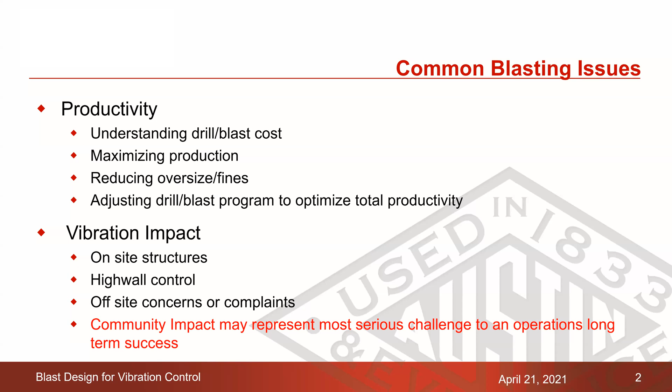I have 3 slides here as an explanation of how this has gone. There'll be 3 mining operations you'll see here, actually 4, and you can see the development around it. But the important thing to remember is when these places were developed, there was nothing around them. I often spend time in mining operations that don't have neighbors nearby, and their opinion is, well, Stuart, that's fine maybe where you live, but I don't have to deal with it. You have no assurances what's going to happen anywhere nowadays around a mining operation, and over the course of time, you really can't predict what the circumstances are going to be. If you're not prepared for that, it can have long-term complications.

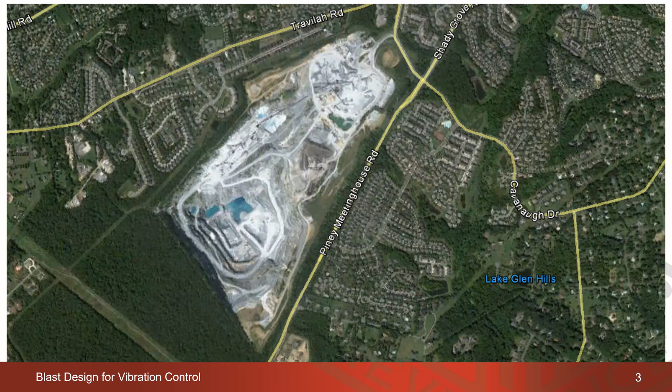Can you hear me now? Yes, sir, sorry, that was my internet dropping off. But anyway, thank you, Andrew.

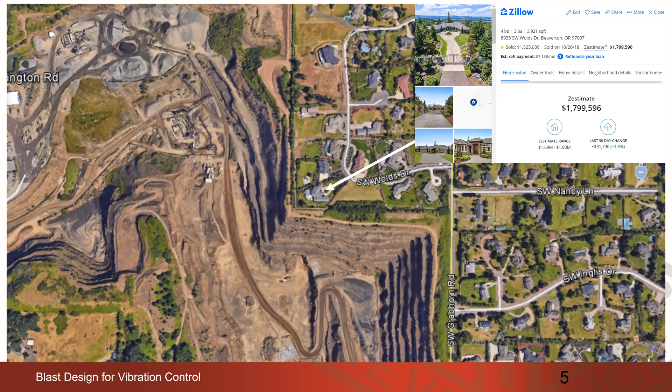So when we look at improved blasting designs, we look at several things. We have increases in electronic initiation systems that have brought a whole new world to us, and that has allowed us to do some new things with vibration. As far as active vibration cancellation, we can do more real-time analysis and look at using alternatives for blasting.

We must say, though, that a lot of times the things we try to do to make improvements are severely hampered either by people's pre-existing beliefs in what works, or by regulations that don't allow us to use the latest technology. So it's important not only to understand how it works, but to be able to relay that message if you need to get the point across that there is a different, better way to do things, and how we can improve on what we're doing.

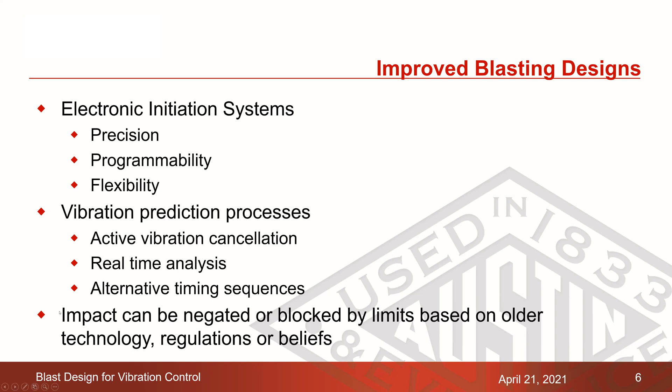Okay, so let's start talking about fundamentals for vibration control. Bill touched on this last week, and again, I think it's worth going back over. When we detonate a blast, we're given a given amount of energy, and we're really going to do 4 things with that: we're going to break rock, we're going to move rock, and whatever doesn't go into that is going to make noise and shake the ground. There's nothing else to be done. Energy can't be conserved; it has to be used, and it's going to go into one or more of those 4 methods.

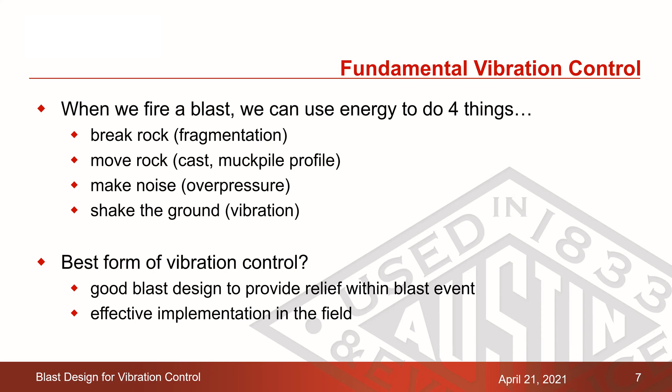So you can really make a talk on vibration control really simple. I can make this easy for you guys: the best form of vibration control is a good blast design. You can have all the latest technology, vibration software for vibration control, but if you don't have a good blast design, it doesn't matter - it can't fix things for you. The first thing you have to do is have a good, sound blast design and effective implementation of that in the field. When you're convinced you've got those metrics in place, then you can look at additional technology to fine tune your vibration control. Until that's in place, you're not going to get where you want to be.

Andrew? I just want to spend a few minutes - we touched on the 8 millisecond definition last week, and just a little bit more detail on that because it plays into everything we'll talk about here. This is the data from the original study back in the 1960s that led to the 8 millisecond delay criteria or definition. You can see it's for 3, 7, and 15 hole shots, shot with 4 different sequences: instantaneously, with 9 millisecond, 17 millisecond, and 34 millisecond delays.

When you look at the results, there's no real consensus whether a fast or a longer delay gives the lowest vibration. The only thing it tells you is that using a delay is going to give you some form of vibration control versus shooting instantaneously. But that's really all we get out of that, and there's no magic that comes from using a specific delay. Next slide.

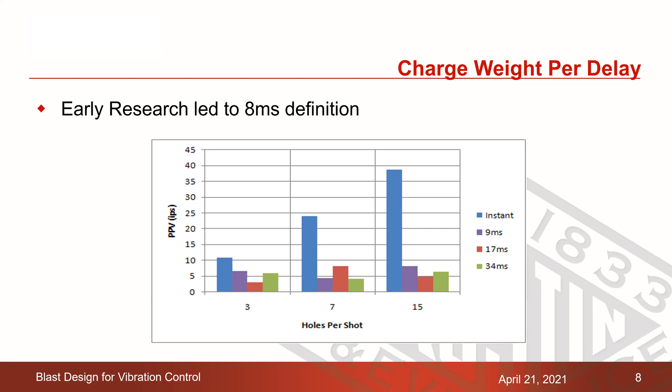If we get into that and really look at what went on in that research and what was available back in that time period, they basically used the technology available in commercial mining. At that time, 9 and 17 millisecond delay detonators were very common and available, and that's what they used in those studies. They were electric, not electronic, detonators, listed with plus or minus 1 millisecond accuracy. So the writers of those papers said, if we have plus or minus and we use 9 milliseconds as our shortest delay, then probably 8 milliseconds was the minimum delay used in these studies.

Their report came out and said if you use delays, it's a means of reducing vibration. And through that came the 8 millisecond criteria that we have. If 25 millisecond detonators were available and they'd used them back then, we'd probably be sitting here talking about the 24 millisecond criteria. There's nothing magic about that 8 milliseconds.

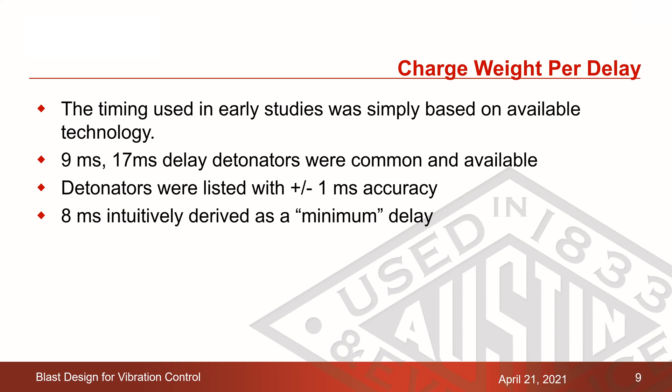As we found since the introduction of vibration modeling, it really doesn't serve very much of a purpose anymore. But we have it. It is used as a definition for charge weight per delay, which leads us to the next slide.

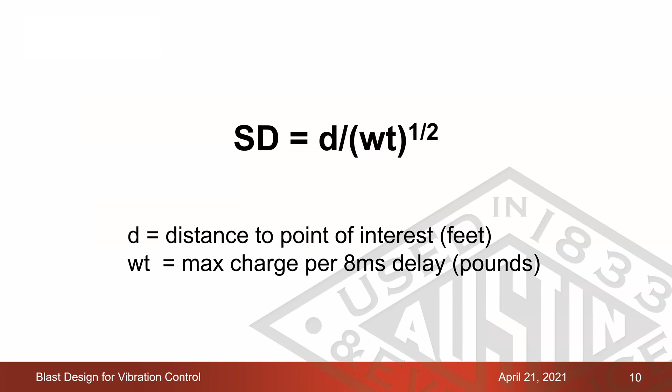Along that line, scale distance of 18, there were shots recorded with a peak particle velocity of 0.14 inches per second, and others as high as 2.9 inches per second. So basing vibration prediction or vibration control in your shot design on scale distance - it's better than nothing, but it really doesn't get us where we need to be to have any confidence in our results.

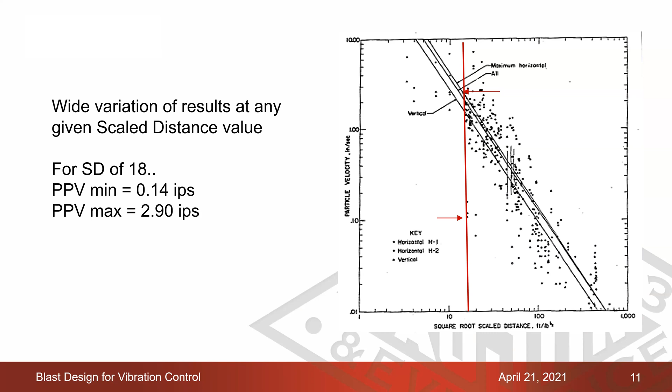That's led us to use things kind of on the passive side for vibration control when we need to reduce things. We've reduced charge weights per hole. We've used decking, reduced shot size, smaller hole diameters. Been there, done all that.

Does it work? Yes, to a certain extent, but it all comes with a cost, whether it's longer time, more labor, more drilling costs, more product costs. Usually it's a hard balance to achieve.

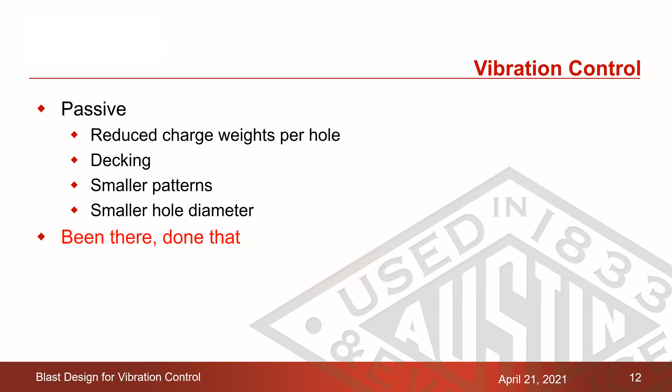So what we have nowadays that we can use, especially with electronic detonators, is active vibration control. It's the concept of linear superpositioning that we've used, and we're going to demonstrate that. The use of electronic initiators has greatly enhanced the efficiency of this technique.

When you marry that with some of the new concepts in software design that Andrew's going to show you in a few minutes, it's really exciting where we are and what we're able to do to get on the front end and get control of vibration.

Again, a lot of my experience is with off-site vibration, but I've certainly done my share of near field, and the rules and laws of physics are the same near field as far field. So the same theories and technology work in both places.

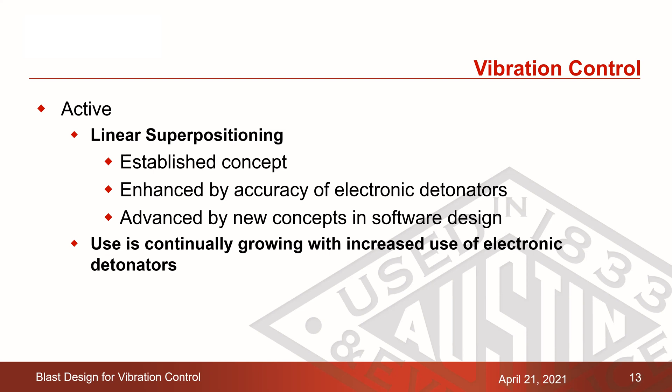So we want to begin with seismic wave interaction because this is where it all starts. Hopefully this is review for everybody, but just to make sure we all understand - when we talk about seismic waves or vibration waves, we're really talking about compression waves that behave just like sound does in the air. Seismic waves behave very much, almost identically to acoustic waves, and have some of the same characteristics. Again, compression waves, we get lower frequency with distance, and most important, those waves can be influenced by other waves. So we can look at a very simple sine wave here to see how that works.

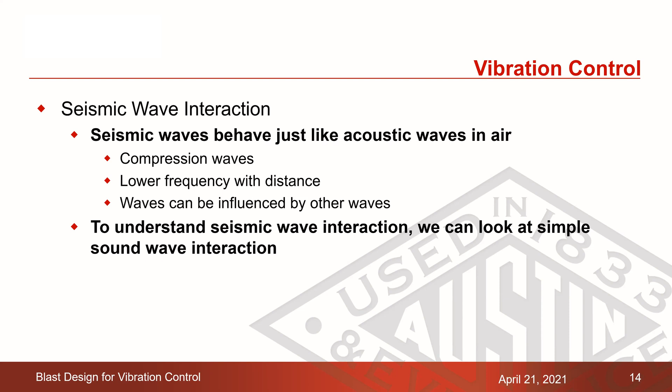So here, we're just going to look at a single sound event, a very simple sine wave. Next slide.

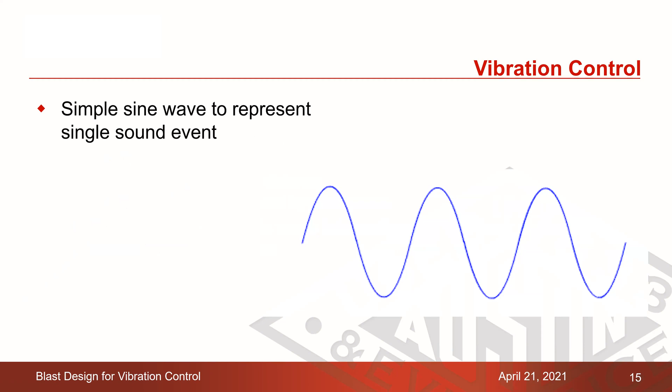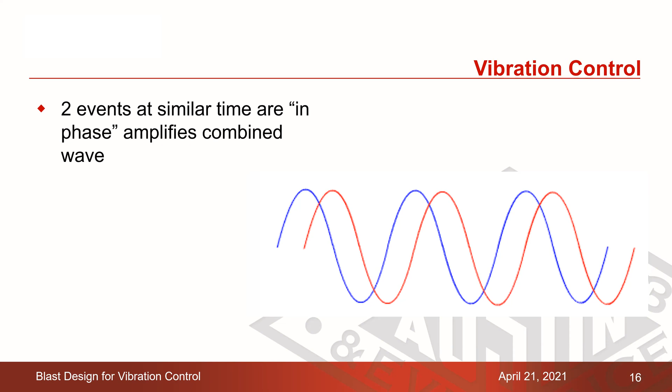If we introduce another sound, and those sounds as they meet, they're very close to each other as far as being in phase, meaning the peaks match and the troughs or valleys match. Those waves get summed up and they actually get added and they influence each other. So the result is going to be, on the next slide, an amplification of that. We will have a higher resultant wave based on those two input waves.

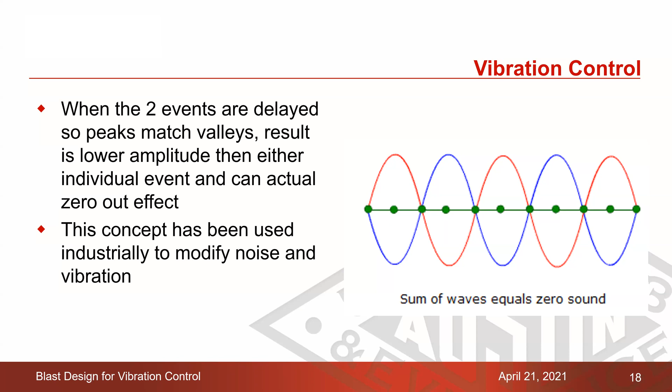The same thing happens if we adjust and get those waves out of phase. Here you can see when we look at the red versus the blue, a peak is matching a trough, and the result can literally be a summation that comes out to zero or near zero. It's a simple concept, but it's effective. It works in nature, and we have started using that in industry in the last probably 20 years, especially.

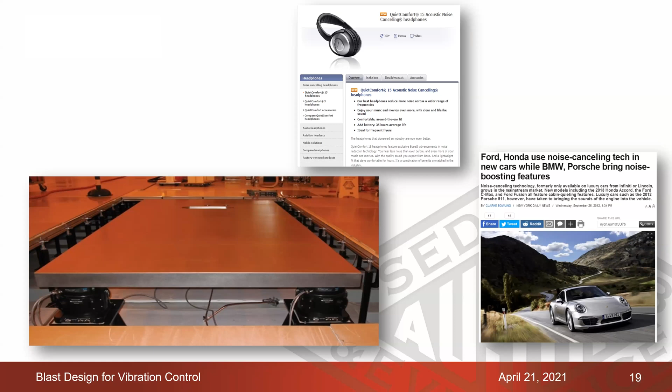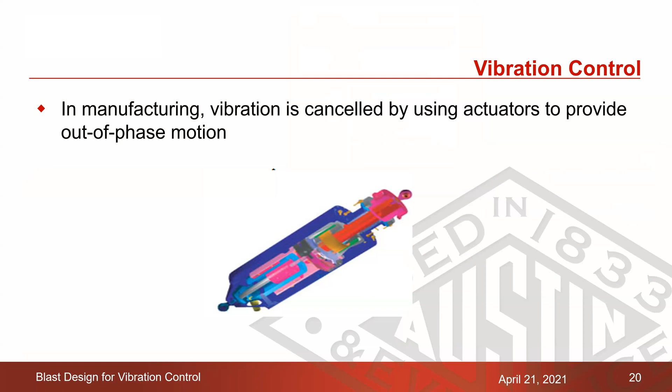So again, in manufacturing, we use mechanical apparatus—actuators—to provide our out-of-phase motion to cancel that out. So what do we do in blasting? A little bit different. Here, we're going to use the energy as our holes detonate to cancel out the vibration that's created from previous hole detonations.

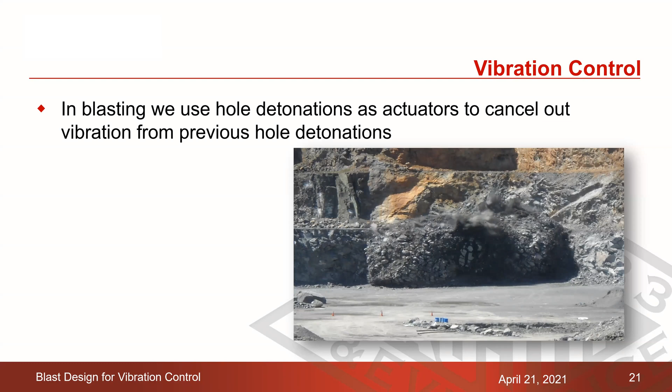So this is where the idea of vibration control came from—looking at what we could do with acoustic waves and translating that into using that same application in seismic waves. So I want to look at some waves again, but look at it more from a blasting standpoint.

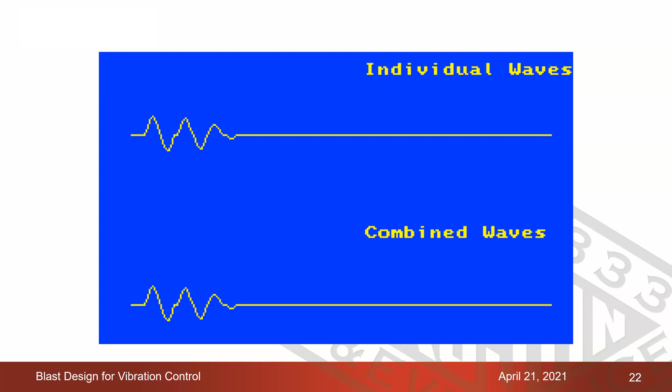What happens next if we go to shooting all 5 of those holes at the exact same time? It's hard to see because those waves are stacked right on top of each other, but imagine there are 5 waves there. When we sum them up, again, the peaks and troughs match up, and our combined wave is going to be much, much higher. When those waves match up like that and give us higher amplitude in our resultant wave, that's called constructive interference.

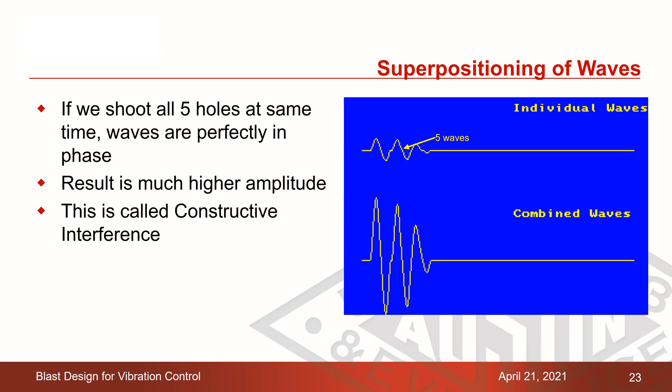So let's look at 8 milliseconds. Remember that when you look at a seismogram and those waves, the x-axis is motion versus time, showing how motion changes over time. Based on the scale shown, our 5 holes have fired, and you can see they've been staggered a little bit. That stagger is the equivalent of 8 milliseconds based on the scale on the x-axis for this example.

So we've put 8 milliseconds between them. But you notice it really doesn't help us, because they're still in phase. They're still matching peaks and valleys, so we still get a much higher amplitude. We're still getting that constructive interference as a result of it.

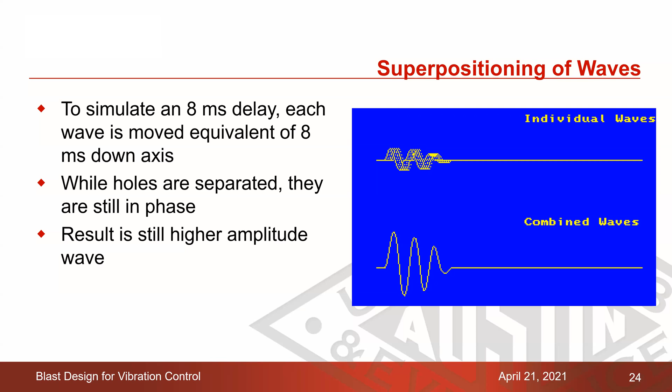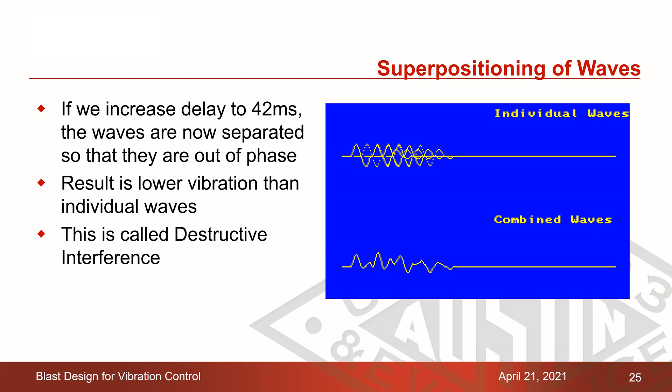When we can use the energy in our shot to create cancellation like this, we call that destructive interference. That is the basis of vibration control software: to try to determine sequences of holes firing that will cancel out energy from adjacent holes or previous holes.

Now, what happens if we go even farther? If 42 is good, maybe a longer delay is even better. Well, again, we're talking about sinusoidal waves here, so if you spread them out too far, you see what happens is we get back in phase again, and now our vibration goes back up.

So there is no simple rule for a blaster, no way for him to know intuitively or on his own whether shooting fast time between holes or between rows, or slow times, is going to give him that destructive interference he wants. It all depends on knowing the shape of the seismic wave that's going to be created by every hole when it shoots, and using that information to determine what delays are necessary in order to cancel vibration out rather than enhance it.

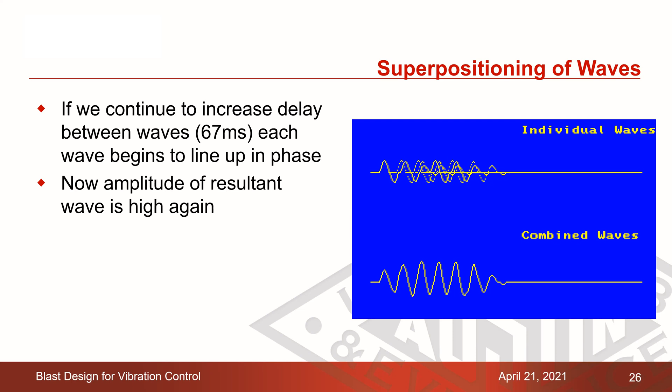So I want to give you an example here, and we want to make sure we leave time for questions. But we're going to walk you through some software that does this.

But again, a couple things I hope everybody keeps in mind: when we talk vibration control, we're talking blast design fundamentals - powder factors, energy distribution, where your holes are distributed, accurate drilling, confinement, proper burden on the face holes.

All that is going to play into not only a good shot in terms of the results you or your customer is looking for - fragmentation, muck pile development, whatever - but you find that when you have shots that behave the way you want and give good production results, they're also going to give you the best vibration results. Shots that are poorly designed, where there are problems, or maybe you lose holes from drilling and the shot comes out very chunky with oversized material and the rock doesn't move, your vibration is usually really high.

So we don't have to make a sacrifice between productivity and vibration control, whether that's controlling vibration for a highwall, structures in the mine, the crusher, or buildings offsite. We don't have to sacrifice one thing for the other. Good blasts mean good vibration control - they work hand in hand.

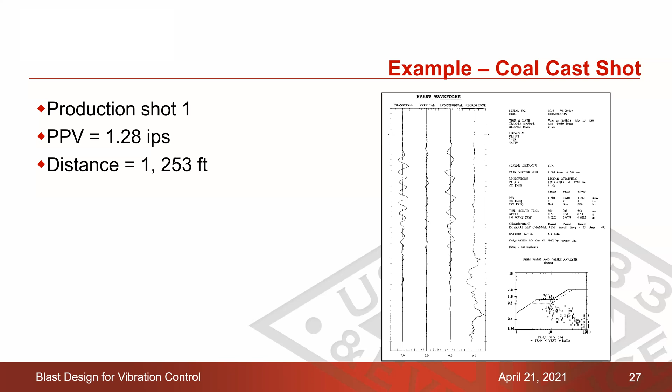Right next to this shot, we went ahead and did a signature hole. Thank you, Andrew.

That signature hole was identical to a production hole, same diameter, same depth, same burden off of the free face. It's as if you're drilling a production shot and you just stop after the first hole, loaded with the same product and shot. The distance is identical or almost identical, and the particle velocity from that single hole is 0.51.

I believe the shot size for this mine was about 150 holes. In essence, in the model, we used that wave 150 times to represent 150 holes firing. The software ran algorithms to determine what delay between holes firing, by moving them on that time axis back and forth, doing it systematically, and then summing those waves up would give us the best vibration results. That's all it does - gives us timing recommendations that we can pick.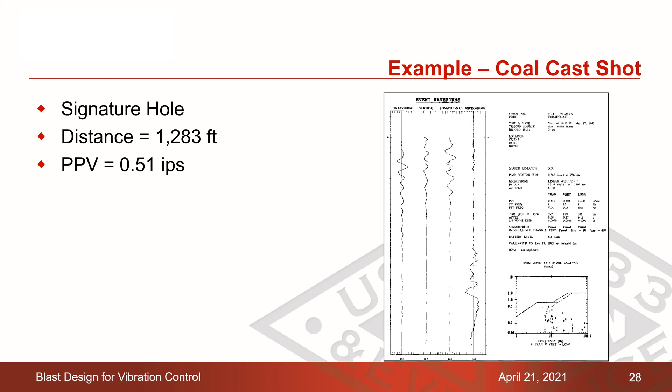The next shot, which I did right next to it, you can see the distances - actually I was a little bit closer - but same pattern, same number of holes, same pounds per delay, same pounds per hole, and we cut vibration by 36%. That's not making any other change, doesn't cost the mine any more money. They're not paying for more labor, more drilling, more products. It's a simple change in the timing used to facilitate this.

With electronic detonators, with most of the systems, you have 20,000 delays, 0 through 20 seconds in 1 millisecond increments. This gives us an amazing tool to come up with and find precise timing using software based on that signature hole that's recorded in the field.

So it's responding to site-specific geology. The shape of that wave is determined by putting that pulse in the ground by that signature hole, that test hole, letting it rattle through the ground and recording it at our critical structures. The shape of that wave is basically a geologic signature of seismic transmission through it, hence the name signature waveform. We use that over and over again to simulate a large shot, sum up the waves, and here's what our result is.

Here we're showing a reduction of 36%. So real simple, that's the way basic vibration control software works.

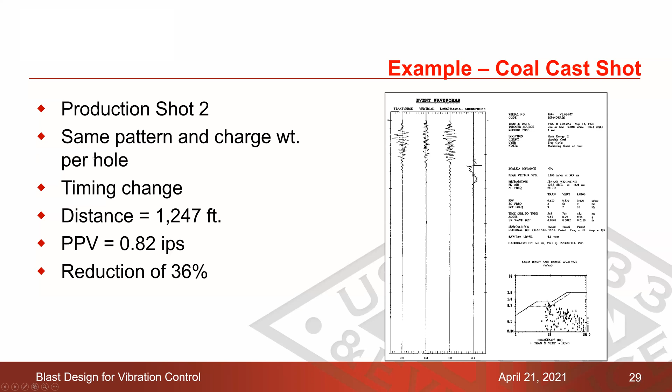All right, thank you Stuart. Good to be here with everyone. As Stuart's mentioned a couple times already, one of the big things is you've got to have proper blast design in order to get vibration results that benefit you, your company, whoever it may be.

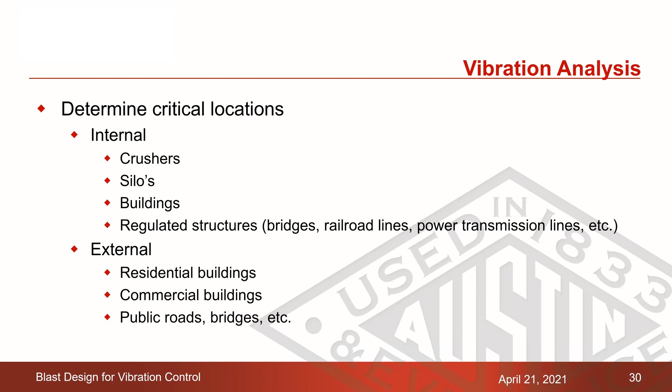What we do with the Paradigm software, as Stuart mentioned, is one of the big things is we have to identify the critical locations for each blast. That can be internal locations such as primary crushers, storage silos, mine site buildings, any regulated structures that cross the property, and even extending into external critical locations such as residential buildings that may be getting close to the mining property, commercial buildings, any public roads, bridges, power lines, any number of things.

A big part of vibration analysis and making sure your vibrations are what you want and good is you've got to be able to determine where your future mine plans are. This goes into setting up the locations for where you want to get signature hole data from, and being able to drill those in areas that you are going to in the future, even if they may be 6, 12, 18, 24 months into the future before you start mining in those areas.

The seismic data will never go bad. It can be used 2, 3, 4 years down the road. So if you've got the capabilities, it's always good to get the data early and have it ready to use, rather than scrambling to collect data once problems present themselves.

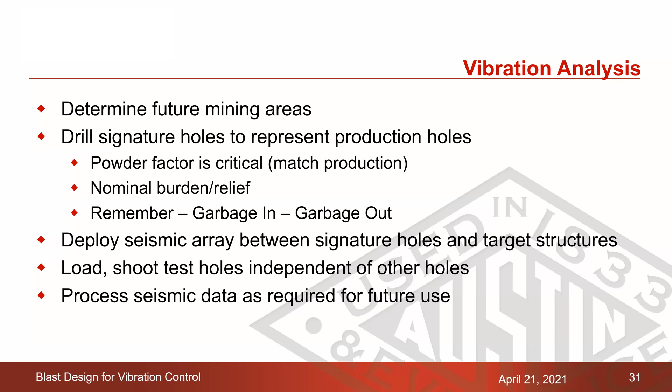This all goes into making sure that signature holes are loaded the same way, with the same burden and relief that a normal production hole would have. When collecting signature hole data, you want to make sure your seismographs are set up correctly. There's no room for movement in the seismograph, because if you're getting bad data from your signature holes, you're going to have bad data to try and make predictions with or analyze your vibrations.

As we've mentioned already, vibration analysis begins with your shot design. We've done this on manually laid out shots by the blaster - the day of a shot, he'll lay out another shot in the pit in a different location, or using a UAV drone and doing 3D models, using smart drills. This definitely helps control vibrations more. Once we've done this and have the design set for how it's going to be drilled, we can start diving into more of the vibration analysis and creating the best blast plan going forward.

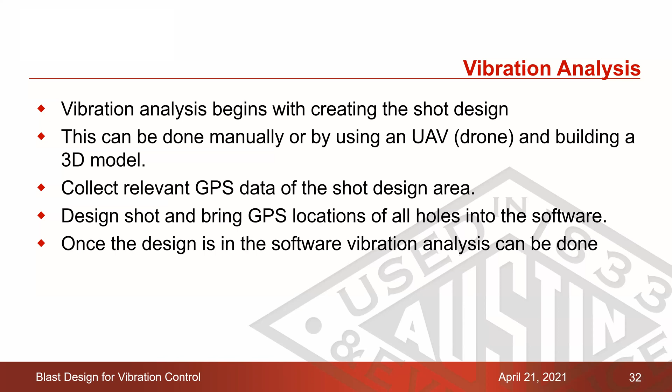As Stuart mentioned, we use Paradigm software as a big part of our vibration analysis. In the software, we are able to produce any timing combination you could want to use - anything from a fixed per distance scenario, where you assign a certain delay in terms of milliseconds per foot, and tie the holes together in your shot. It will measure the distances between those holes and assign the delay period as needed.

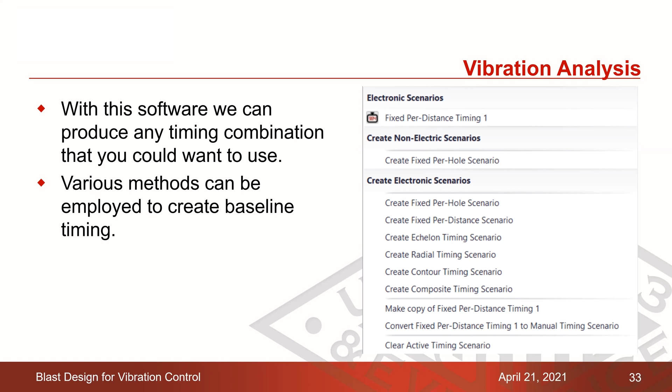We can do a fixed per hole scenario, echelon scenarios - really any timing scenario that works, we can use that and come up with a version that will work.

These are some very basic tools we look at when doing our timing vibration analysis. We can see how the shot is going to progress in terms of which hole is going to fire when - useful to see, making sure you don't have holes in front of something that shouldn't be going off yet, or holes behind something that shouldn't be going off yet.

As well as timing contours - so if in your operation you have certain benches that tend to shoot better in a certain direction, you can make sure the timing plan you came up with is getting that rock moving the right way to give you the best muck pile and vibration results.

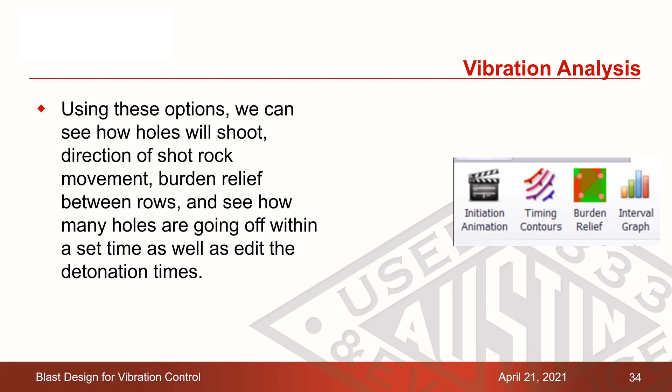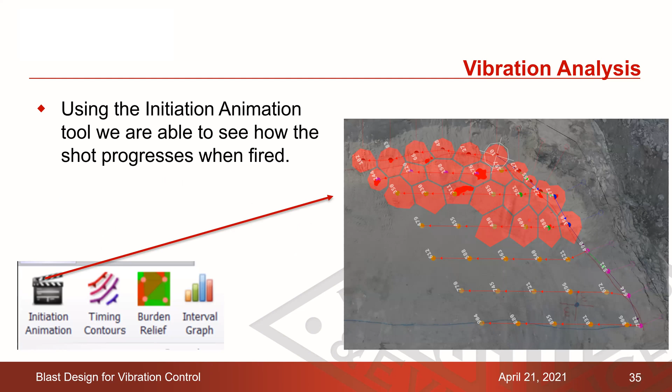Same with the burden relief and interval graph. Here's the initiation animation that I was talking about. As you can see, we can follow and see how the shot is going to progress as the holes are detonating. It's a good double check, making sure the timing's correct, making sure nothing funky is going on.

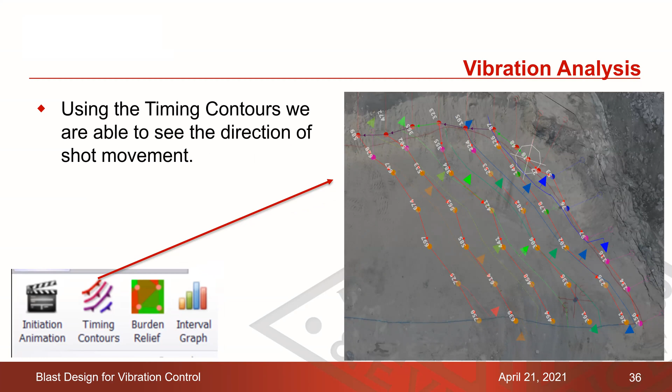Burden relief - this is showing from row to row how much time and movement the rock in front of each hole is going to have before the hole detonates itself. It's a good tool to use to make sure you've built enough time to allow for rock movement and get the correct burden you're looking for on your design.

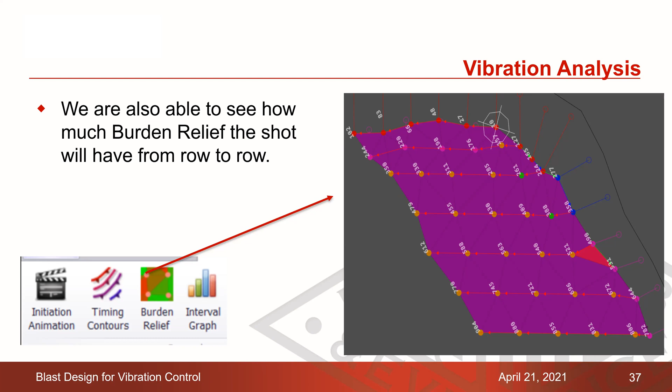Looking at the interval graph, we're able to see if we have more than one hole designed in the timing scenario to shoot at the same time or within a certain delay period. This is beneficial when it comes to limitations of charge weights, or holes firing in a given interval, such as what Stuart was mentioning with the 8 millisecond rule.

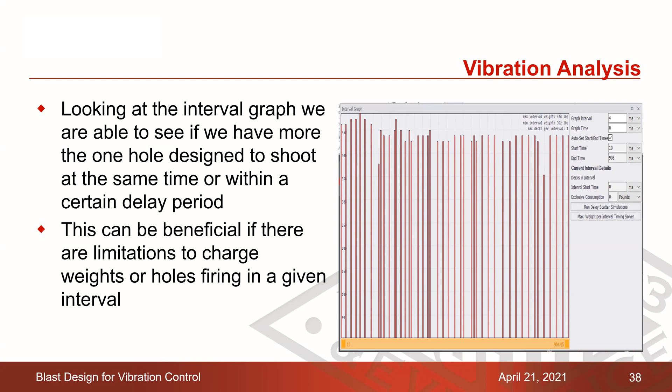This is where we really get into being able to optimize our vibrations, using these tools. But first, we have to optimize our basic design, and then we're able to analyze the vibration and fine tune the results to what we're looking for. Using these tools, we're also able to get a rough vibration prediction for the shot, if that's needed or if it's a more critical area - we know beforehand going into shot day what the rough vibrations are going to be.

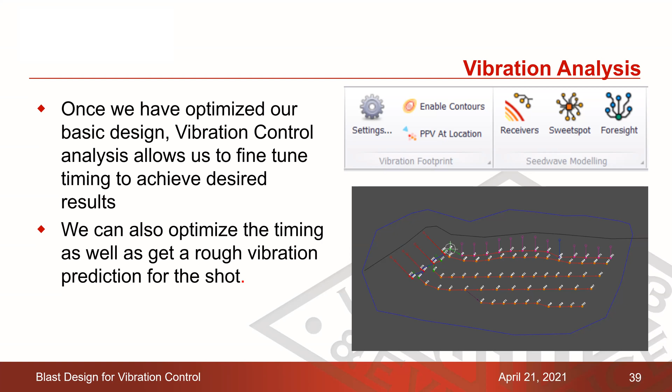Continuing, here we can see data from the signature hole testing can be accessed. It allows us to determine critical structures and what data to use. The blue dots are seismograph locations, and the black lines are faults going towards signature holes. So the signature hole data, you can trace back from the points to the seismographs, and those seismographs are using the data that was collected by shooting those signature holes for future consideration when determining vibration predictions.

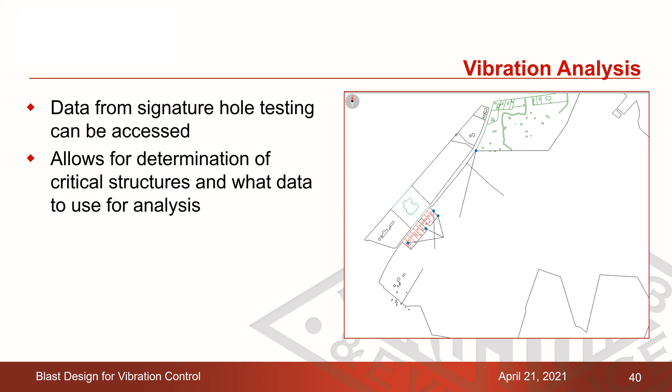You can also see the shot pattern, including the nominal timing created to allow for accurate determination of data. The location of the pattern, signature test holes, and critical structures is all used by the software. We'll see in more detail what that looks like over the next couple of slides.

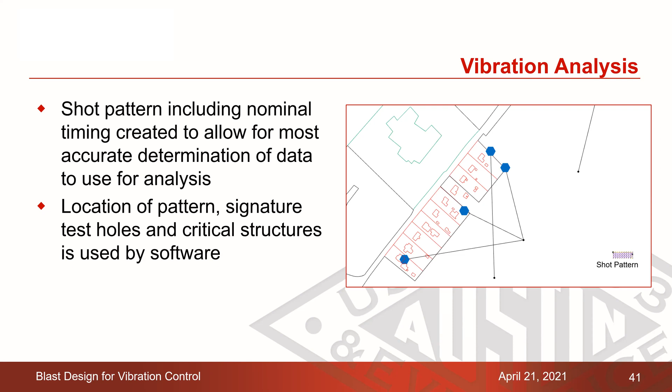In many cases, our signature holes are recorded with production blasts, and using the software we're able to clip the waveform of the signature hole itself. So as you can see here, on the longitudinal, transverse, and vertical waveforms, we're able to see where the signature hole was fired, and we're able to use that and clip that data for future models and future considerations.

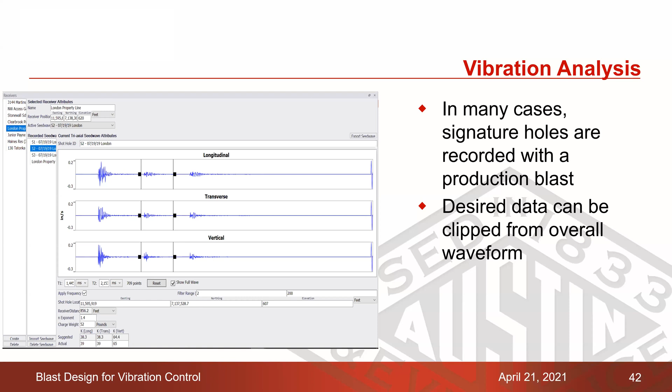This is one of the tools we can use to find and dial in our timing design to create an optimized timing plan. If we know the propagation velocity, it can be entered. We can also weight the different structures and different seismograph locations. If one is closer and of more importance, we can weight that one heavier in the model, and the simulations will adjust accordingly. Or if everything's of the same importance, we can leave the weighting the same and it will determine the best from there.

Looking at the delay periods, this will run in simulations and look at the different timing schemes that could possibly be created from plus or minus 5 milliseconds of the delay. So if one delay in the generic timing scheme you create is 21 milliseconds, it will look at a range of 16 to 26 milliseconds to analyze and try to optimize the vibration results.

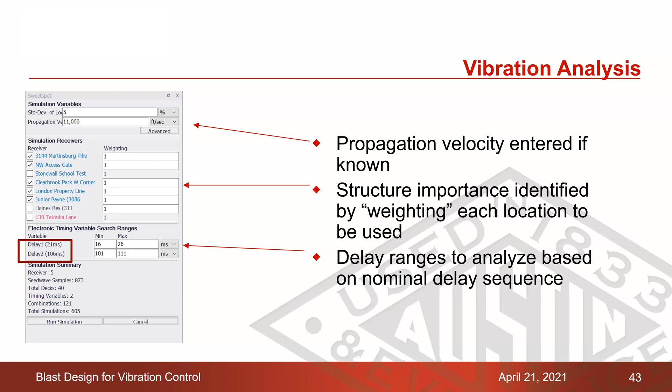Additional analysis is based on the Monte Carlo technique. This allows us to introduce randomness to the timing variables and come up with the best delay sequence. The Foresight tool, which we'll get into more in the next couple of slides, allows us to simulate the blast any number of given times to get a prediction of the resultant vibration using whatever timing sequence.

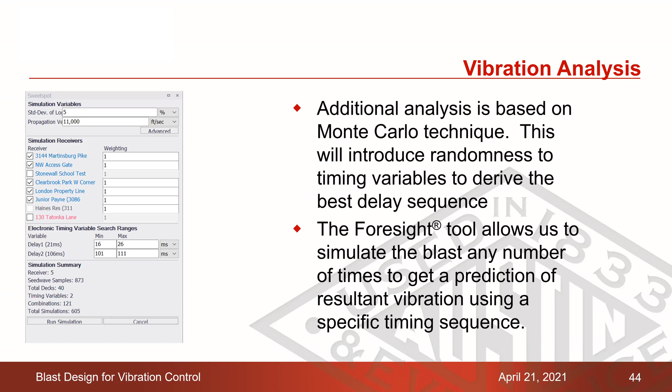So here's the results of the Foresight tool. As we can see, you can sort the results by your peak particle velocity, your PPV, your frequency, and your perception index. Your perception is going to be a result of your PPV and frequency, so the lower your perception, the idea is the less impact it's going to have on your seismograph location.

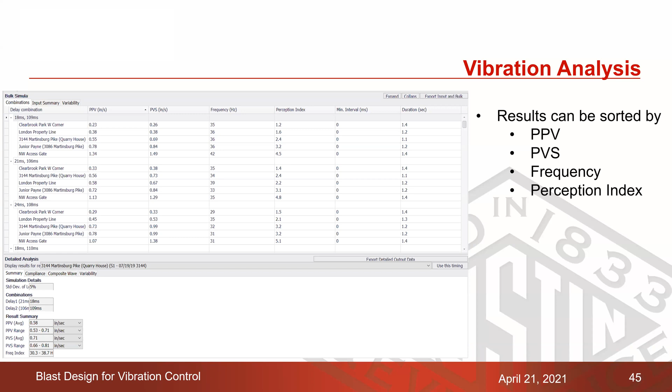This is another tool where you can choose certain seismograph locations to optimize your timing for, or in this case look at 3, 4, even 5 different seismograph locations. You can weigh the results based on your PPV, frequency, perception index, or any number of factors to select the best timing solution for that specific shot.

Moving ahead, you're able to select and optimize electronic timing to ensure compliance at all nearby sensitive receivers. We get those results using the Sweetspot tool and the Foresight tool.

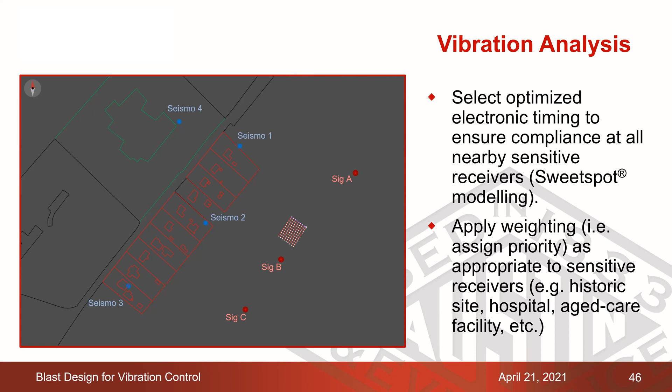We're able to apply weighting to see which seismograph location is a more sensitive location, or if they're all just as sensitive, we're able to leave the weighting the same.

This is another tool we're able to use in the Paradigm software. It will allow us to identify directions of vibration enhancement due to the timing sequence and timing plan, and allows us to see the impacts of what the vibrations will be 360 degrees around the shot area.

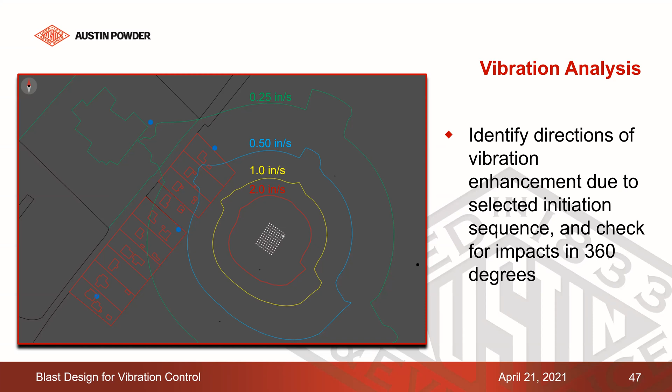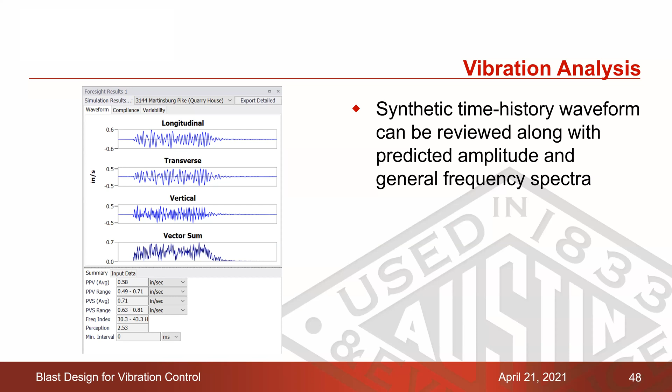So just to tie everything back together, when using the Foresight tool, we're able to see a rough approximation of what the waveforms will look like, along with predicted PPV average, amplitude, and general frequency. So if the selected timing that we either use or come up with does not meet our expectations, we're able to go through these tools multiple times and make adjustments in order to find the best sequence and timing plan for us.

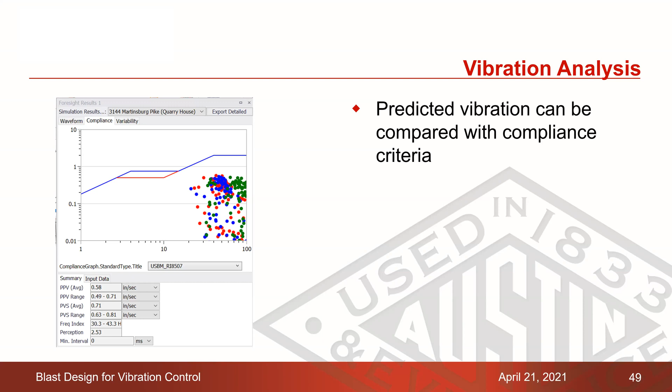We're able to see what the predicted vibrations are when compared to compliance criteria, such as the Z curve shown here. It's a really useful tool, especially for operations that are a little more sensitive to vibrations, either because of close neighbors or important structures nearby. Being able to see this and confidently know going forward that the timing sequence is correct and should have no issues as far as regulatory compliance is good to know.

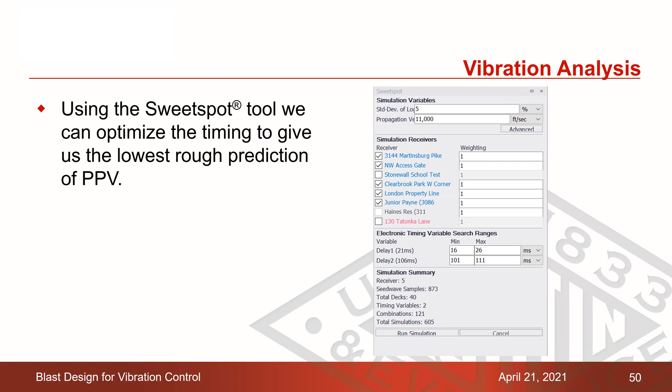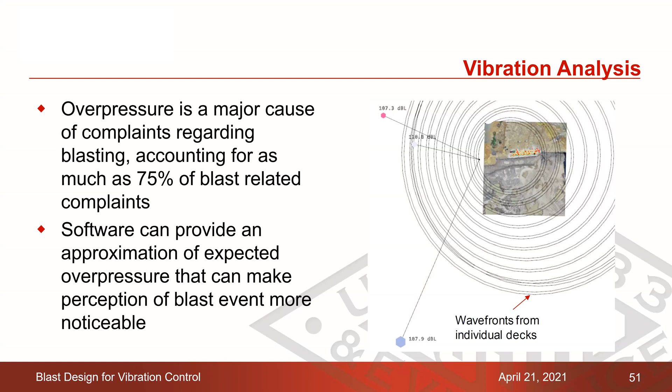Overpressure, as we all know, is another major issue when it comes to blasting. It's a major cause of complaints regarding blasting, accounting for as much as 75% of any blast-related complaints. The software we use can provide an approximation of expected overpressure that can make perception of the blast event more noticeable. As you can see here, this shows the wave fronts from the individual holes detonating, so we're able to see how, as the shot progresses and gets farther from the location, the air overpressure dissipates over time.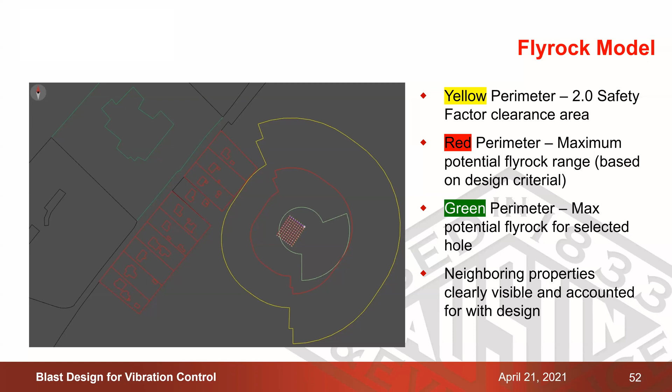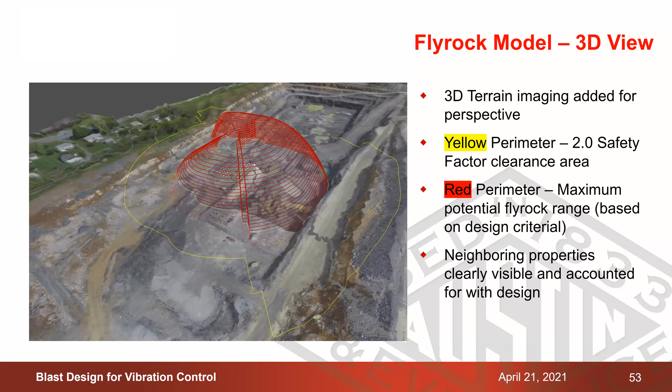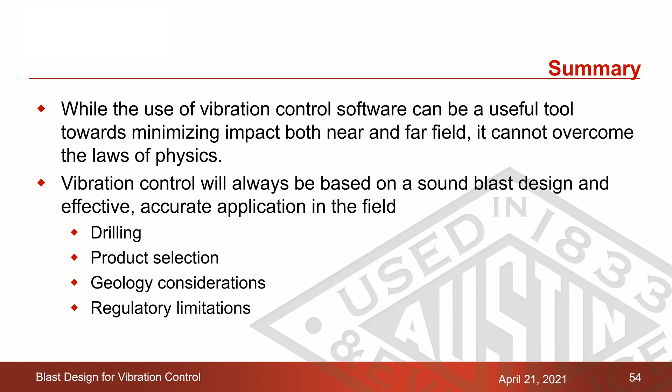So once again, it comes back to blast design. While the use of vibration control software can be a useful tool towards minimizing impact in both near and far field, it cannot overcome the laws of physics. Vibration control will always be based on a sound blast design, as we've mentioned multiple times this afternoon, and an accurate application in the field. This means making sure your drilling is done correctly, you're selecting the right products for your blast, accounting for any special geological considerations, and any regulatory limitations you will face regarding your specific operation. I think that's it.